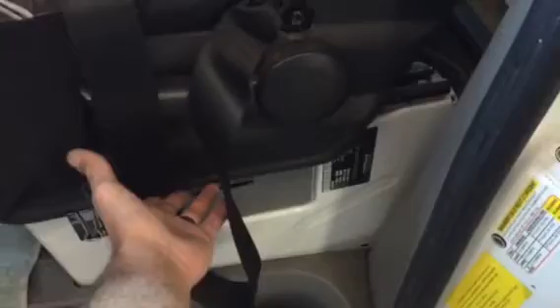Alright guys, sorry to have to rush through this, but I'm just going to go through the PSM upgrade, parameterizable special module for idle upgrades, as well as different consumers on the Sprinter van. So first step, the PSM module gets installed underneath the driver's seat. It's got the two harnesses that plug into it. And then you're going to have to plug in on the right side kick panel.

There's the CAN bus. You're going to find a loose CAN wire over there. You want to plug that in. It's going to be a brown and red wire, the body CAN. So that is for the PSM module. Once you plug that in, once you code all these modules in the Sprinter to look for the PSM, then it'll actually find it.

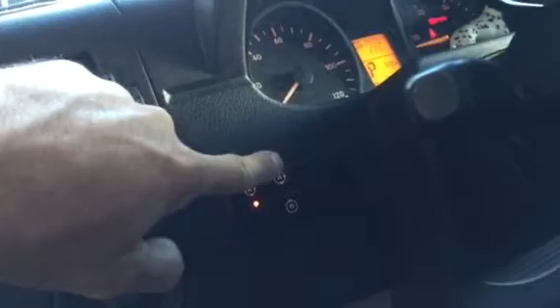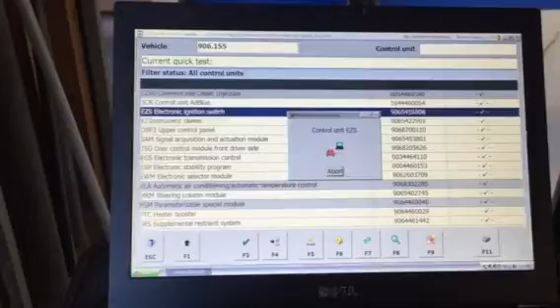So we did an idle upgrade on this particular Sprinter. Oh, I'm actually in the control now. So I'll show you coding. Mercedes says that you should only have to SCN code the key. That's not true. Found that out the hard way. It's the EIS right here. Unit adaptations, SCN coding, coding display. All coding settings.

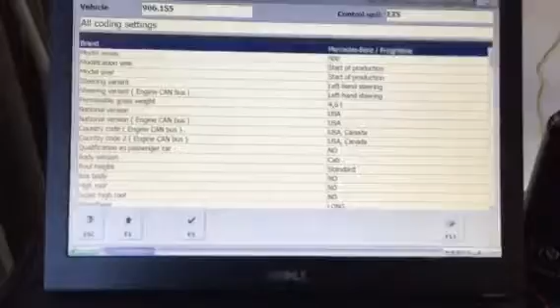Does anyone have a 20 on Derek? Okay.

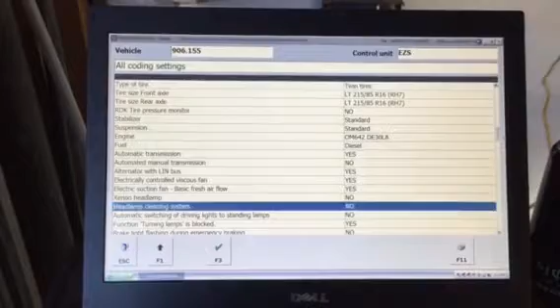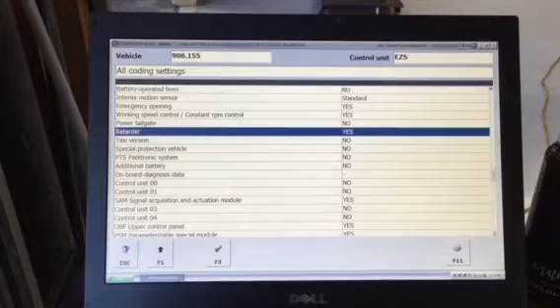So you see all these different options available. There's a key module, the EZS, or EIS is what they used to be called, is the gateway between the body CAN and the engine CAN. It's going to store all the data as far as what should be on the CAN network, as far as equipment. And I'm going through all this stuff. Okay, so first thing you're going to want is make sure that your working speed control, constant RPM control is yes. Retarder is yes on that one. And then you have the PSM module right here that has to say yes.

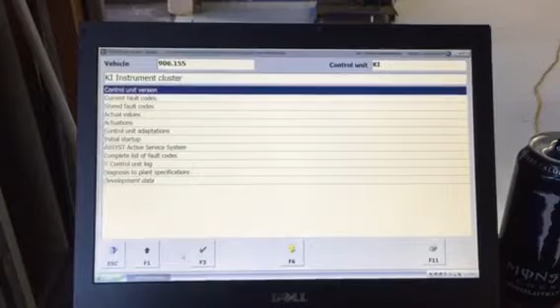We have a developer mode SDS, so it allows us to go in through this section, and there it is. So we can actually code it through this. A lot of times at the dealer, you want to do an SCN coding flash, try to get that auto logic and try to get the SCN coding through that tool, and it was no success. So there's your EZS control unit. First one. Second one, instrument cluster. Coding adaptations. SCN coding, coding display.

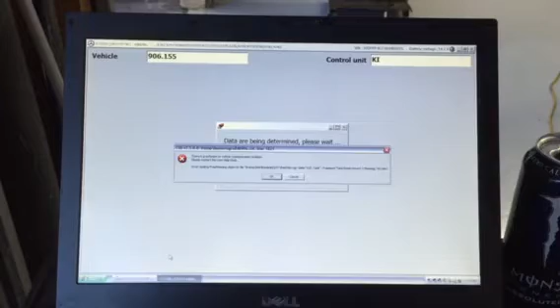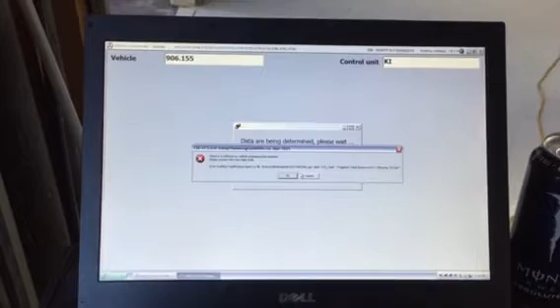Why you've got to do the EIS first, the key module, is because that's what's actually going to tell everybody on the CAN. Oh, there we go. Great. Anyway, let's see if I can get it to go the second time. It's going to tell everybody on the CAN to be looking for the PSM module. Okay, let me go to the other side. Here it goes first, a little more.

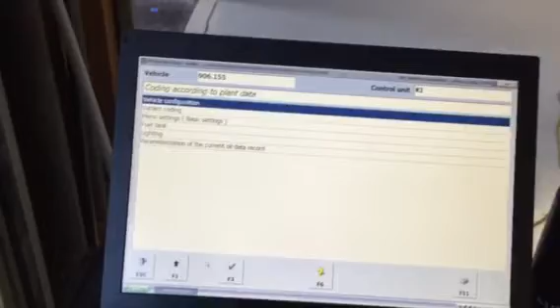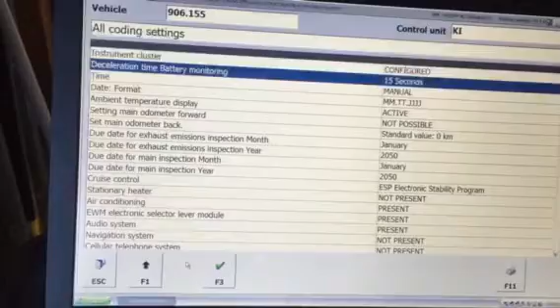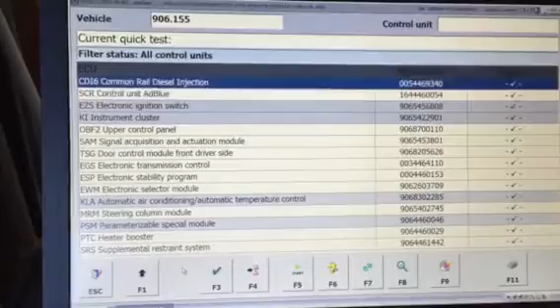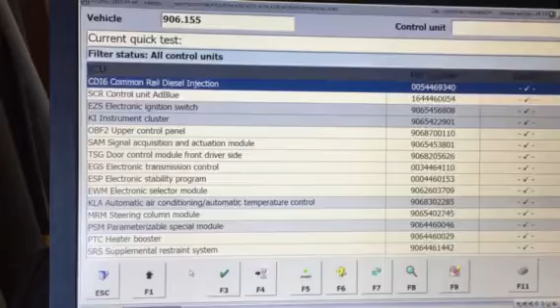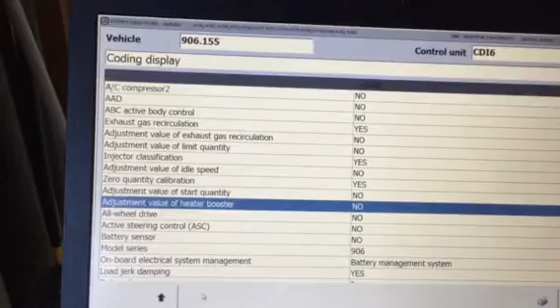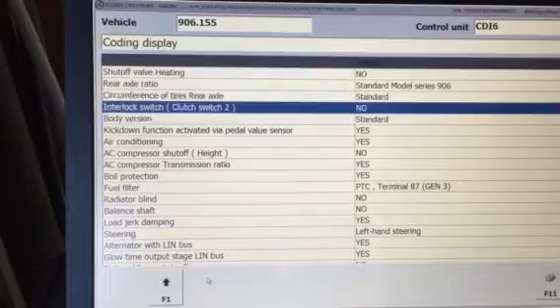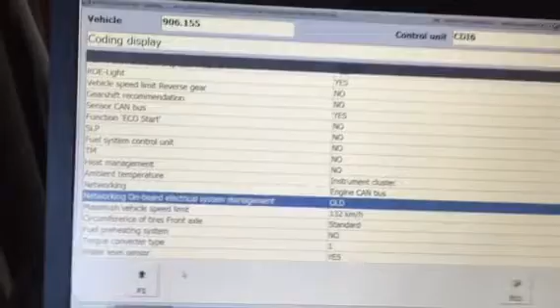So if you look at this coding according to plant data, that's a developer mode version. On the factory tool, you won't have that. A lot of times the only guys that have access to the factory stuff to do this are the upfitters who apply for that. Alright, we're going down, going down, going down. PSM, again, special module, yes. There was one more. Let's see here. It wasn't all just the PSM, it was...

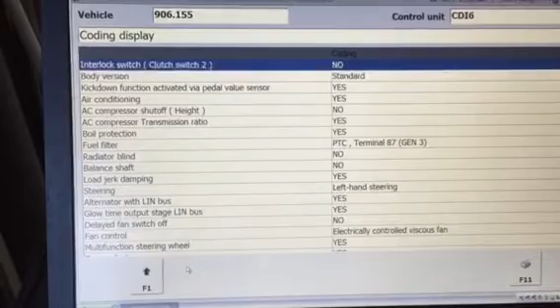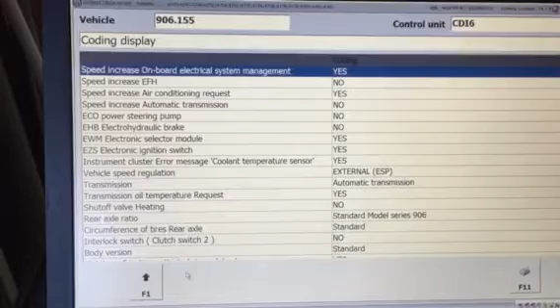Okay, that's the other one. The speed increase, onboard electrical system management. That was no. I selected it to yes, if you want something else to be able to control it, which is the PSM module. So those are your different coding options that you have to make sure that you have for the PSM to operate correctly.

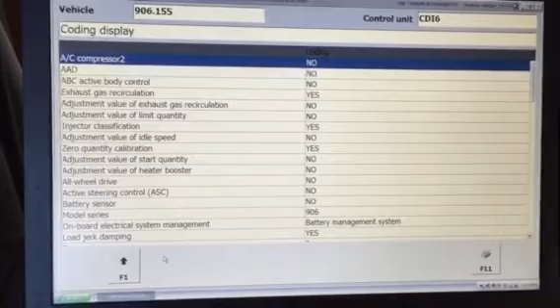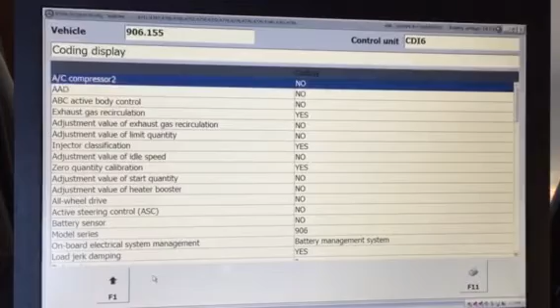At the dealer, it was easier. You just pushed a button and you got a file from Germany and they loaded it in. But for us guys on the independent side, it's a little bit difficult. This is how I was able to do it. So those guys who are upfitting these things or putting the PSM modules in your Sprinters, that's what you need to do. Alright, hope this video was helpful.